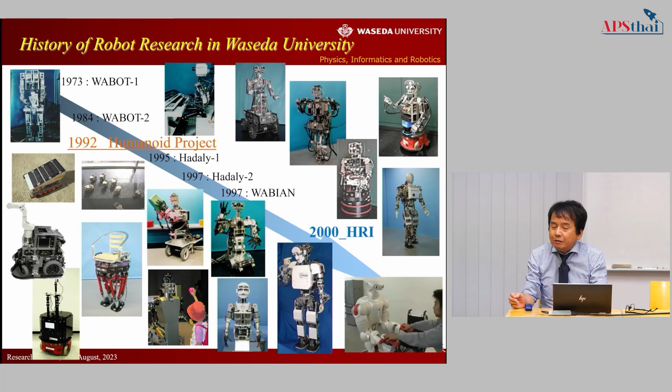We established a humanoid project in 1992, and after that we developed many robots like this. So Waseda University is a very famous university for robotic studies in Japan, not only Japan but the world.

This is a video that introduces the first robot to walk. You see, the robot is able to walk, very slowly like this. Can you recognize it? The robot walked very slowly. Can you guess how many seconds it required?

Almost 30 seconds for one step. This means the robot kept balance in each motion like this to move one step, so it took 30 seconds. This way of walking is very different from our walking, because we do not walk like that. We walk like this, very quickly.

Instead, in each motion you cannot stop. While walking, if you hit something, you fall down. This means that in each motion you do not keep balance. We call this dynamic walking. Dynamic means time dependent. Our body moves dynamically, meaning not static. Static is to stay balanced in each motion. But the first robot was not similar to our dynamic motion, but a static one.

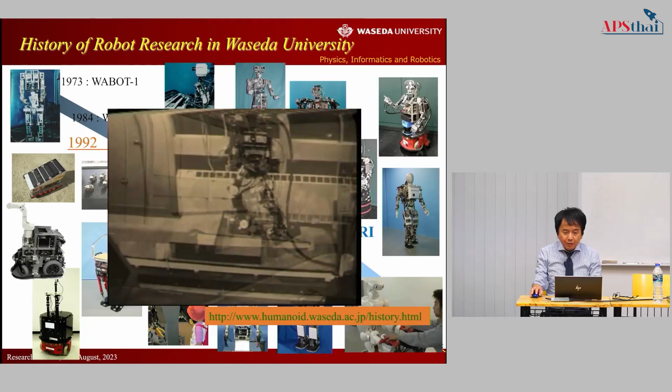Okay, this is WABIAN. It walked much faster, like a human, and also the new version could walk on steps. It was almost 40 years ago. And so far we have developed many kinds of robots like this.

And this is again the second robot to play keyboard like this after reading and recognizing musical scores.

In Japan, we had an expo in Tsukuba City, north of Tokyo, and in the expo event the robot played this keyboard with a real orchestra. It was really a sensational event that the robot could work together with human musical players like this. This is a kind of collaboration with humans.

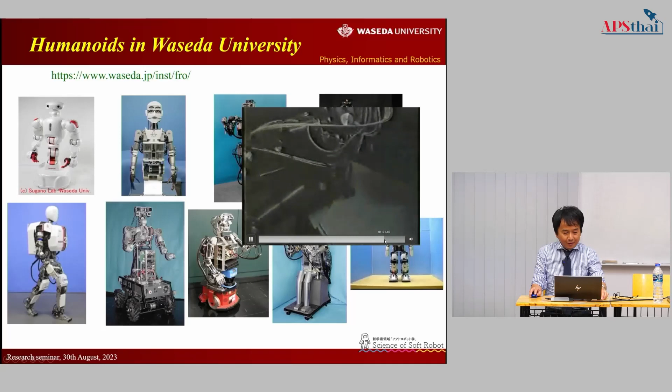Like this. And then next one, this is a biped robot, this one.

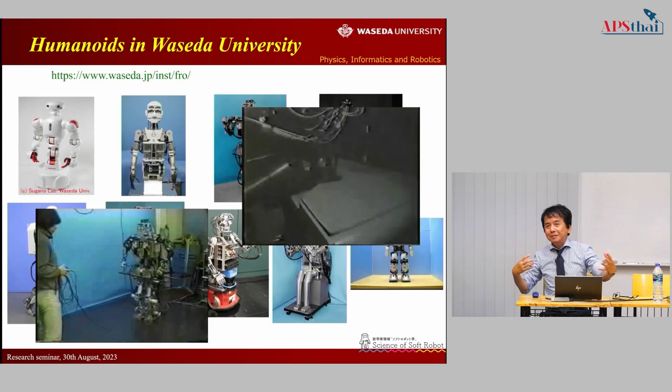This robot is a bipedal robot, and the robot is able to express emotion, like a happy walk or sad walk, like this. It is a kind of exaggerated expression, but we tried to let the robot express human-like feeling by moving the body differently. Also, this is the first trial of such a robot in the world.

And also, this is the latest one. Do you know Gundam? It's an animation. About 5 years ago, we established a project called Gundam Global Challenge, to develop a real-size Gundam and let it move at real size. This is really a big event, and we prepared it for the Olympic Games to be held in 2020.

But due to the corona situation, the Olympic Games were extended into 2021, and the Gundam project was also affected. Professor Hashimoto is the former vice president of Waseda University, and he was the leader of this project. He is also my doctoral supervisor, and in fact I got my PhD from Professor Hashimoto.

This is my colleague in the Hashimoto laboratory, Dr. Ishii, who is also a Waseda graduate. This robot was realized with the power of Waseda University—almost all the members of this challenge were Waseda graduates.

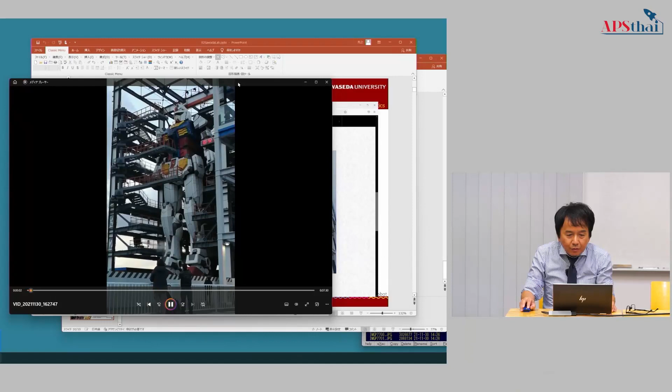This is the human, this is the robot. Let's skip ahead... it starts moving. Let's go, let's go. It starts moving like this.

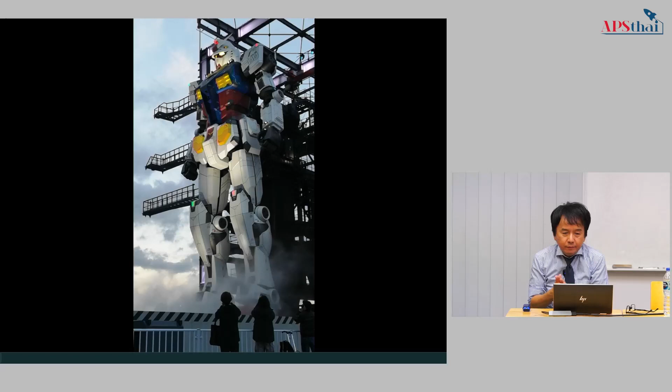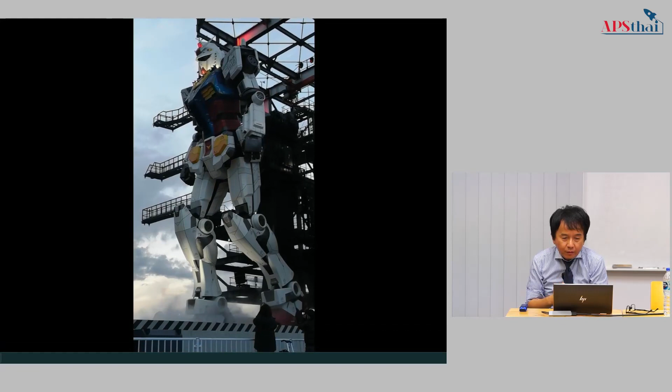Let's skip ahead... it moves like this, with the size 10 times bigger than a human. Incredibly, like this.

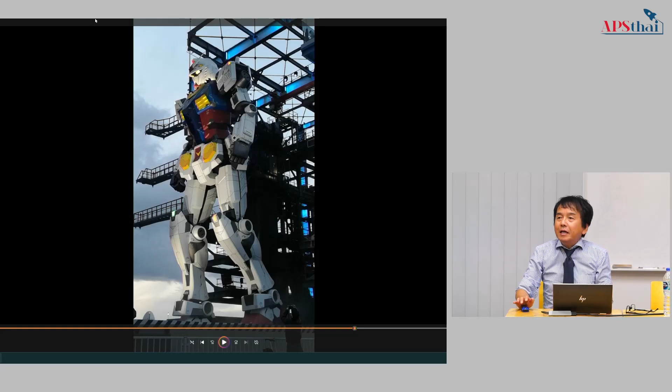This robot will be exhibited until March next year, 2024, so you have almost half a year to see it. After the exhibition, it will be disassembled because maintenance is pretty difficult. Also, this area has a contract until next year, so we have to give the area back to Yokohama city without anything. So if you want to see it, you have to go within half a year—after that, nothing. It's amazing.

It is pretty big, and it is amazing. To construct this one, we developed many components, especially the motors.

How many motors does the robot install? Maybe an uncountable number, especially in the elbows, knees, and ankles. We developed especially strong special motors with special power, because there were no such big motors so far to let it move—so we had a very big challenge to realize this machine.

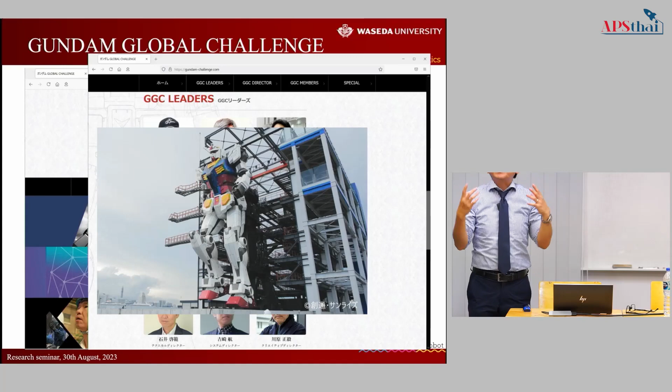Then also, suppose we humans weigh 60 kilograms—the unit is kilograms in Thailand, right? When we walk like this, how much weight would you expect in the knee for a 60-kilogram person?

You can see that aged people sometimes have problems with their knees—some aged persons have pain in the knee or ankle. This means exceptional force is given to the knee or back when you walk or move. Can you guess how much force? About 5 times your weight just to walk.

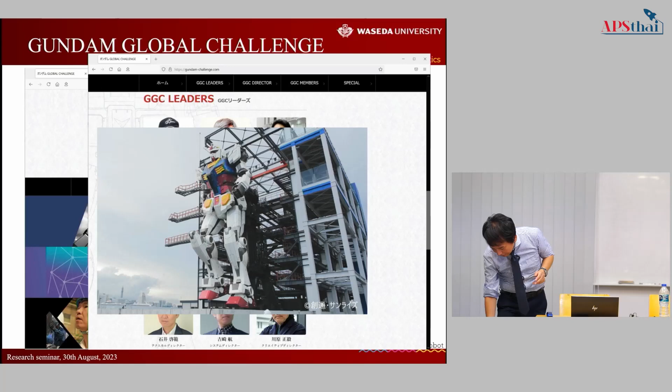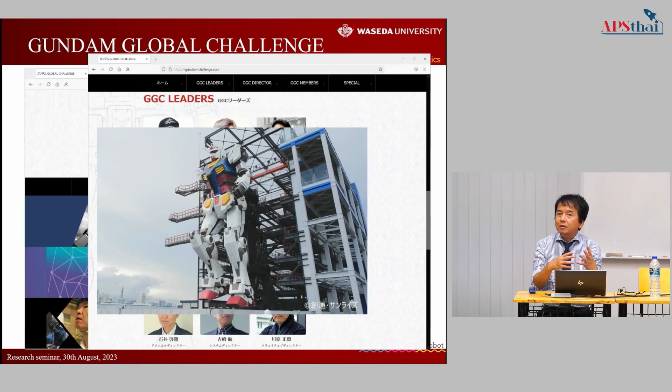For a person weighing 60 kilograms, more than 200 kilograms of force is given to the knee, the bone, and the junction. It's a pretty big force for the human body and biological material like bone and joints. So if you get too strong a force in the knee, you may have trouble in your knee or back due to this force affecting your joints—you have to be careful. Just to walk, 5 times your weight is given to the knee.

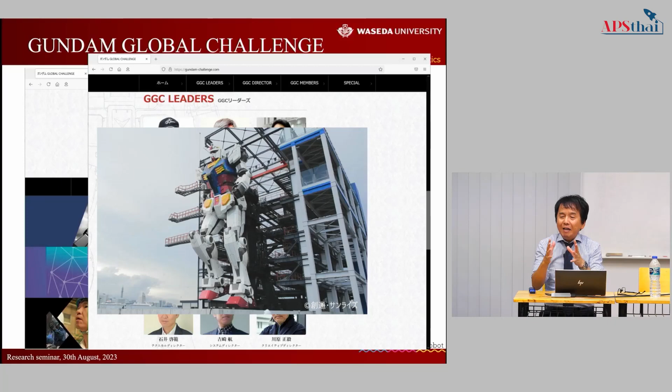And when you run, the force should be 7 or 8 times your weight—pretty strong force. This is physics. 60 kilograms is the static weight—while just standing, static weight is given to your body parts. But once you move, you have the dynamics of motion, which you study in university in the subject of physics. About 5 to 7 or 8 times greater force will be given. This is science. This is physics.

For the development of robots, you have to consider not only the mechanical reproduction of the body, but also how much force is given to each part, because materials have some limitation of given power. It will break if you give stronger force, especially at the junction. If you want to let the junction move, you need to give power or force to the motor for the junction. So this moving force has to be calculated beforehand at the designing stage.

This is very important. If the motor power is not enough, the junction won't move, or it will be broken due to the force. So beforehand, you have to calculate how much force will be expected in the structure of any part of the robotic body, to realize it.

Then the robots. As you know, many robots are running in industries like manufacturing systems and factories. The robots work to assemble or to weld the parts, something like that, and we call them industrial robots. These robots work in industry, I mean the secondary sector of industries. We have many of them. To manufacture such robots, we have to consider the machines and the materials to be strong enough.

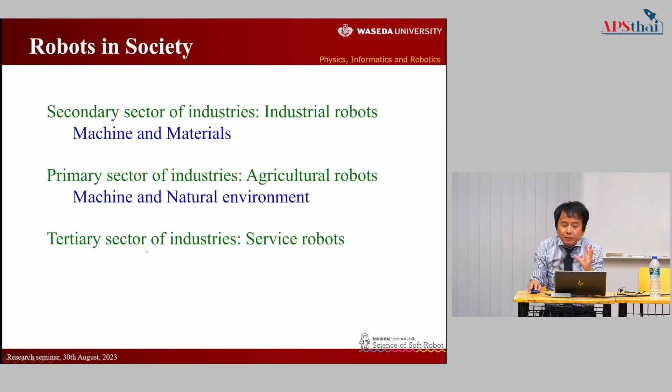And also the third, tertiary sector of industries, which should be service robots or services. These days in a restaurant, we have robots to bring your dishes to the customers, right? Yeah, we have such robots these days. Such a robot is able to recognize the tables and the people. When you walk, the robot stops.

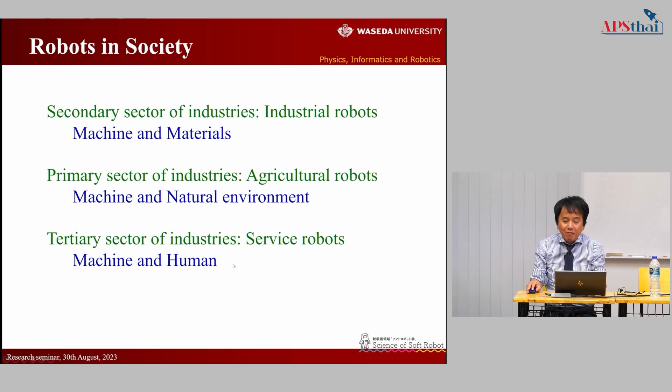And also in the airport, Suvarnabhumi Airport - I came to Bangkok 3 days ago - I saw a cleaning robot in Suvarnabhumi automatically moving. I walked to the robot, then the robot stopped in front of me, not to collide with me. It is good, very good, it was cute. So such service robots have to recognize humans and to work in a human environment.

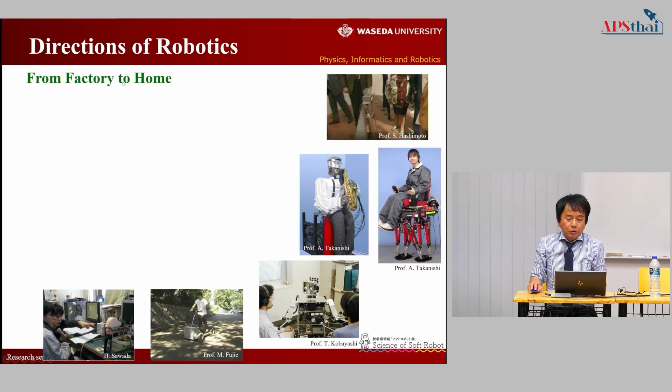Okay, maybe it is okay, I skip it. The directions for robots: in stages, from the secondary sector, to the first sector, to the tertiary sector, the robot should go from factory to home. Such robots have to be human friendly, to work with humans in a human living environment. And then also the robot should be Superman to human.

The industrial robots are something like a Superman, because such robots are able to manufacture an uncountable number of products repeatedly. You know, humans will be tired if they make repeating work, but the robots are not like that. It is like a Superman - they are not tired, they work much faster than humans to produce, right?

But for human friendly robots, the robot has to be not Superman but human. This is an important idea, so that the robot is able to simulate or understand what the human is, so that the robots are able to work together.

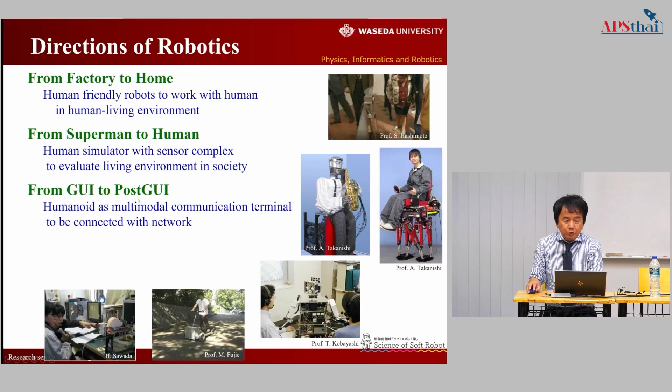And also the interface - interface means the interaction between the robots and humans. Such robots should accept human gestures or human walking, so that the robots are able to work together by body touch or gestures, something. So we call this post graphical user interface, or complex interactions.

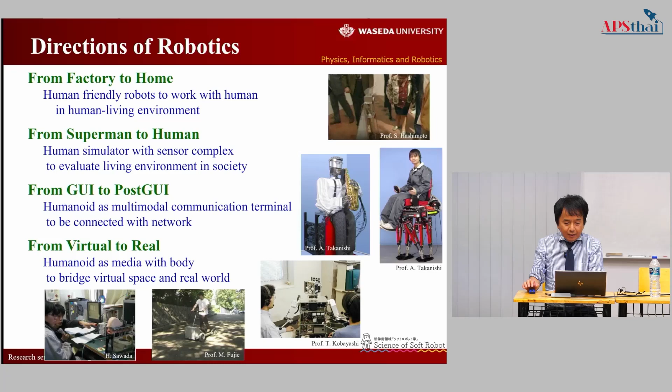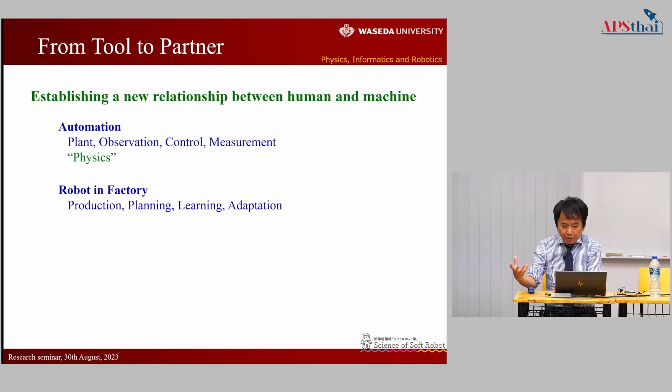Okay, then in the research of robots, so far the robot has been developed for automation. In such robots, what is important is to understand the physics to work in production. And in the second one, the robots in a factory have to work logically, assembling something by following programs.

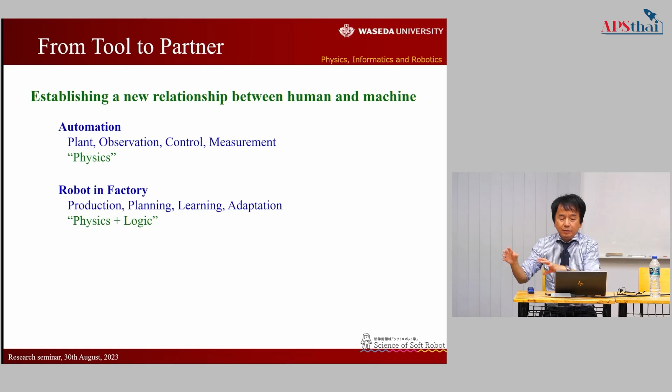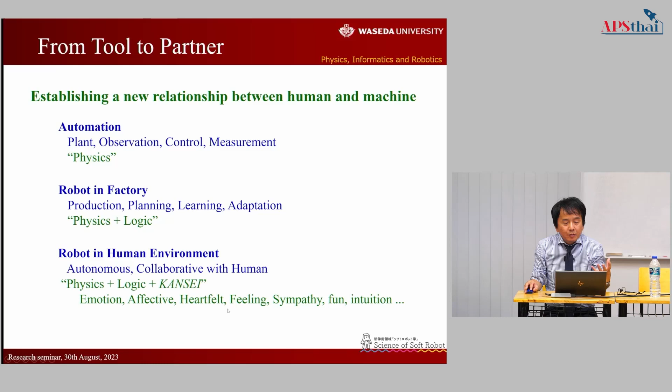And the robot in a human environment has to understand human - kansei is a Japanese word which means emotion, human feeling, human sympathy, or human intuition, something like that. This is what robotic researchers these days are working on to develop new robots. What is important for such robots is firstly artificial intelligence, to recognize the human environment like a human brain - AI is a word, as you may know.

Artificial intelligence is intelligence demonstrated by machines, in contrast to the natural intelligence displayed by humans.

The idea for AI was born about 80 years ago. It was first introduced by McCulloch and Pitts as a neural model, a simplified model of the human nervous system.

Later, at the Dartmouth workshop, the term artificial intelligence, AI, was introduced. AI is the word for reproducing human brain activity or human thinking using computers.

Then Rosenblatt introduced the perceptron, a way to realize calculation using computers.

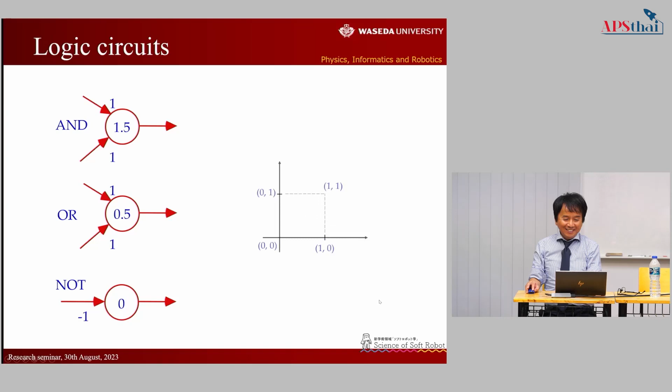Then it has been developed into a computational model like this. The calculation in a computer is made like this. These calculations are made for the learning of the functions to translate input information into output.

Like voice and words, or a face picture and who this is, something like this—any relation. This is deep learning. For detail, maybe you will study this in a university.

And I'll show you some applications of AI. These days, many applications have been introduced in your daily life and work, for example, cameras in the street.

I'm not sure what is the situation in Thailand, but in China, for example, China is an AI country. All over the country, uncountable numbers of cameras are situated in the street, and all the people are recognized in real time - who you are, and where this guy is walking anywhere. Then criminals can be swiftly caught by the police in China.

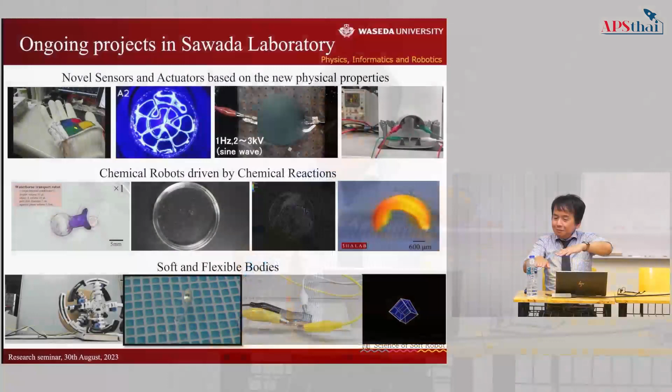And this one, maybe you haven't studied, but the capillary wave involves surface tension. What do I explain... surface tension is... how do I explain? Okay, in a bottle, you have water here. Then there is an interface between the air and the water liquid. In the interface of air and water, there is a surface tension generated by the water against the air. This surface has some tension called surface tension, but this tension changes according to some physical force given from the air.

We try to use this surface tension phenomenon to... how do I explain... you don't know the Fourier transform, maybe not. Okay, do I explain? Okay, sound - does anybody play music? Oh, that's good.

Okay, musical notes, or pitch, have information about the vibrating frequency of the air, right? Each note has a specific frequency. Frequency is the number of vibrations - for example, 100 hertz means the air pressure changes 100 times per second. This means musical notes are related to this air pressure change. For example, C3, the third range of C, has a frequency of 131 hertz, right?

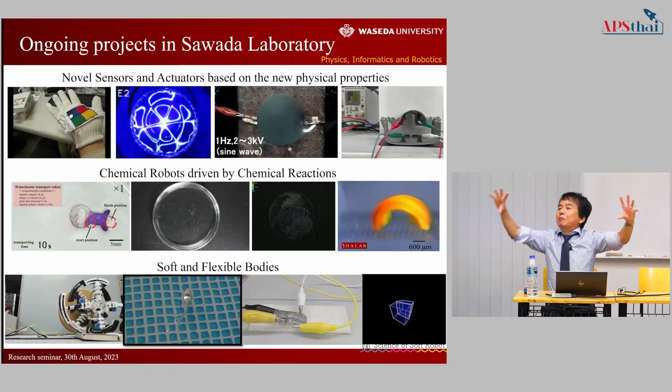We let this robot be a leader. I'm working with a professor in the fishery department, and we try to apply it to make this useful for the fisherman, for effective fishing.

Okay, how do you think of the 4th dimension? Maybe you are living in a 3-dimension, but mathematically we can define a 4-dimensional space, not the time dimension. In 3-dimension we have x-axis, y-axis, z-axis, and in the 4th dimension we have one more axis, perpendicular to each axis.

It is called 4-dimensional space. You cannot see it, but it exists mathematically. You are living in a 3D space, and you watch TV. TV is 2-dimensional because there are only 2 dimensions, right? You watch TV, and you can guess what occurs inside. You can estimate the 3-dimensional space from 2 dimensions. In this manner, you are living in 3-dimension.

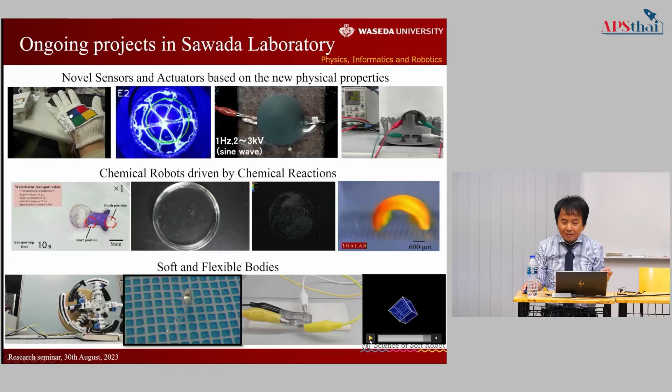We make some calculations like this, mathematical calculations to project the 4-dimensional object into 3-dimensional space. Then we make 3-dimensional computer graphics to let it be seen like this. Okay, then how do I... I have 10 minutes or?

Okay, yes, the new actuator. Do you know shape memory alloy? Oh, you don't know, but you should know. Shape memory alloy is an alloy that remembers its shape.

For example, it is used for teeth modification. For the teeth modification, you put some wires. The wire is made of a shape memory alloy, and it memorizes the shape of the arrangement of the teeth as you wish. Then you put it in.

The inner mouth is kept at a temperature like 30-some degrees. In the environmental temperature it is lower, so you can change the shape. But once you put it in your mouth, the shape is kept and preliminarily remembers the shape. So the wire is used for the modification of the arrangement of the teeth.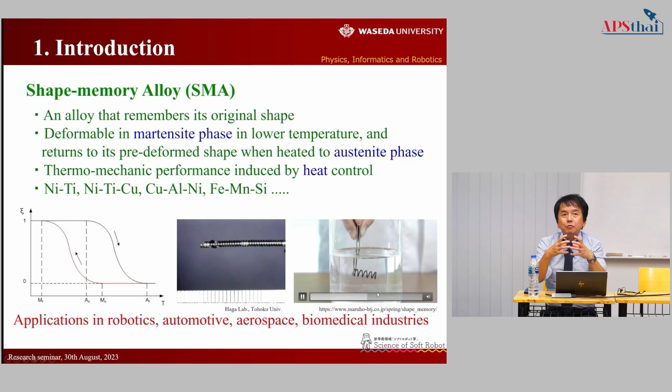Very slow. But in my research, I try to make it move 1,000 times a second. Very fast. And it was successful. I have invented a way to make it move very fast.

Okay, I'll show you, like this. It moves. You see, oh you see. It moves much faster than the other one, and also it moves a lot. The wire is situated here, and you cannot see it because it is small. Then it is extended into a longer one.

Okay, you see, it moves like this. In this part, the wire moves. And also the wire moves up to 1,000 times per second. This means that by giving this vibration to this wire, this motion can be detected electrically.

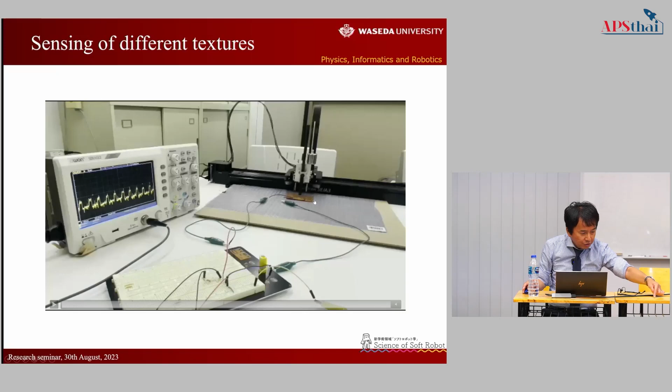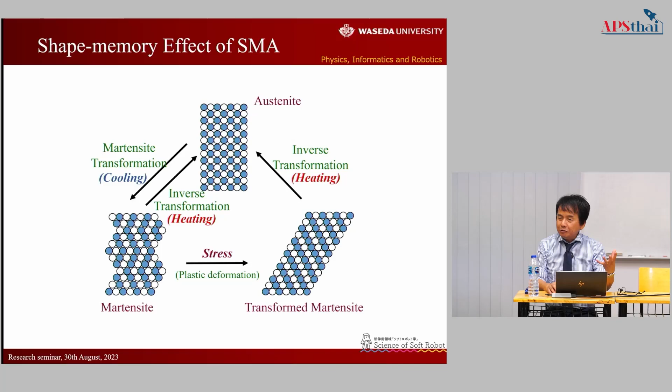We realized it by giving tension, then the resistance changes like this. This means this shape memory alloy works to make a vibration, and simultaneously it is able to sense this small motion, to sense different textures. So far these are the physical phenomena that you will study in a physics department in a college.

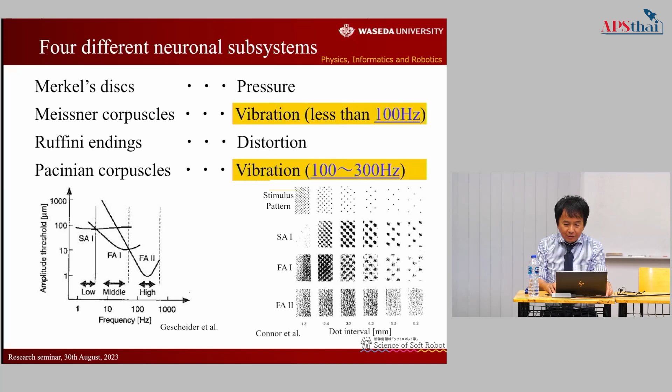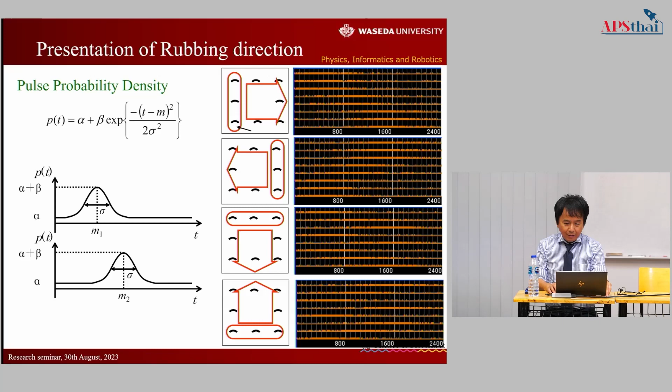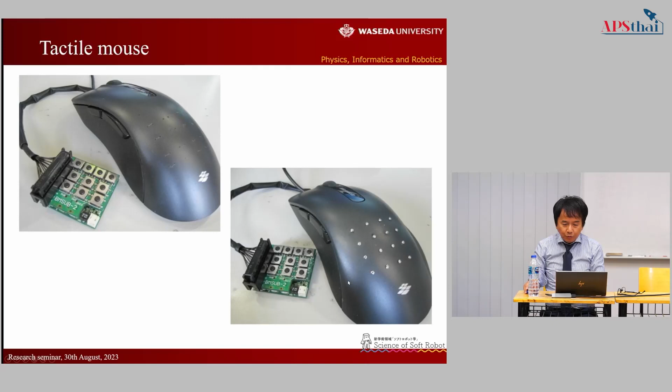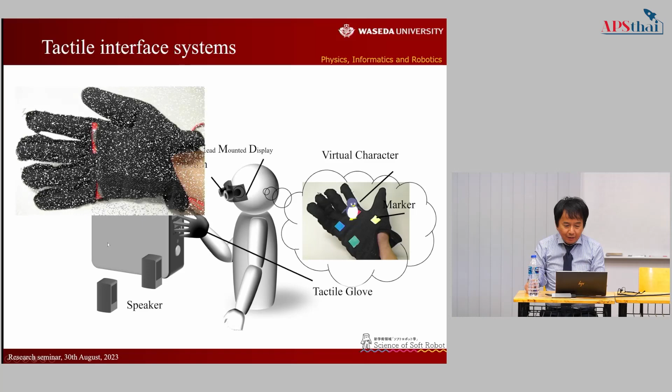We have developed a tactile display and tactile sensor. I don't have much time, so let's see the results. With a tactile pen, the tactile displays are situated here. By stroking the display, you will feel the different textures inside the computer, like this. And also this is a tactile mouse, so that you feel the object inside the computer. And also a tactile glove, and this is the demonstration you already saw.

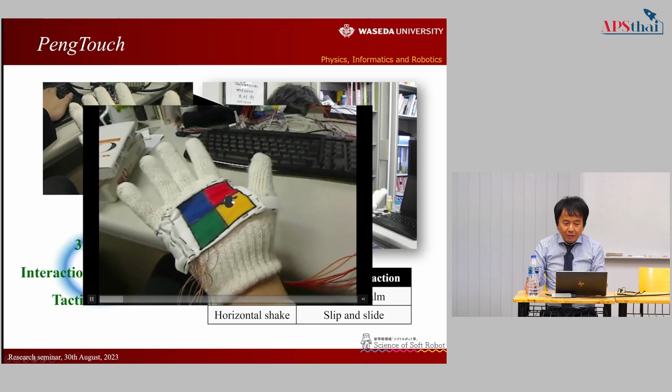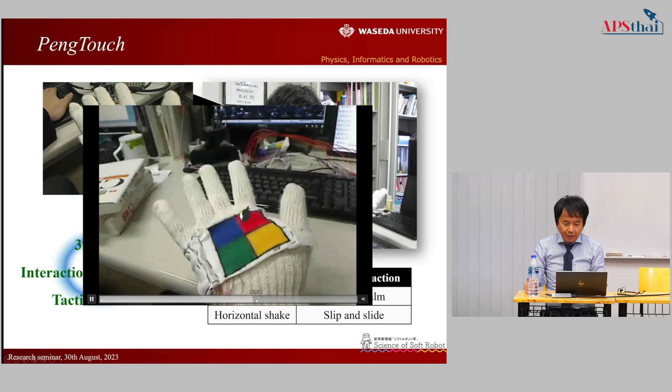The penguin is walking. Also, by moving his hand, it jumps, and the jumping sensation is felt on the glove. Then you shift it, the penguin slips, and slipping sensation is given like this. In this manner, different sensation is given to the glove.

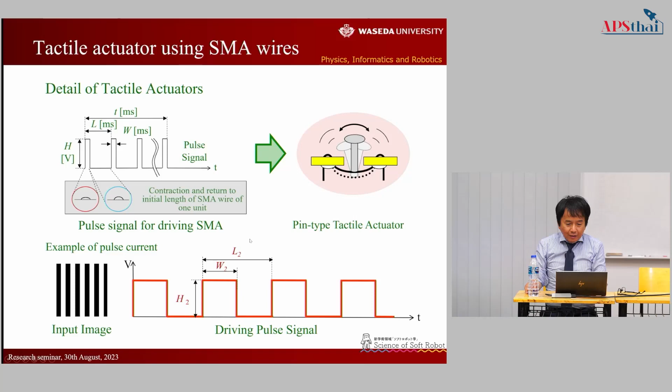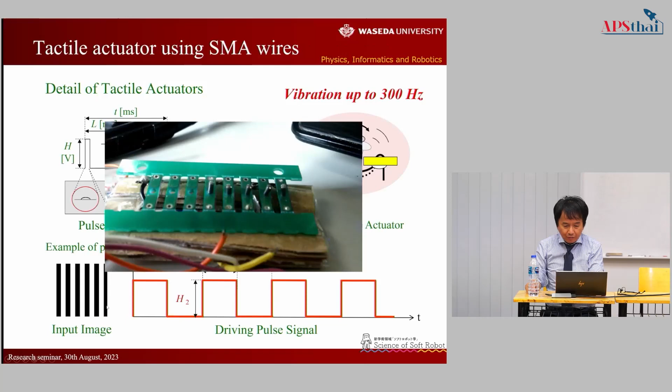The actuator is moving like this, and we put this actuator into the grip, so that this guy is able to control this robot. Here the camera is situated, and it records the floor picture, which is shown here. Then the sensation of the floor is simultaneously given back to the user in the grip.

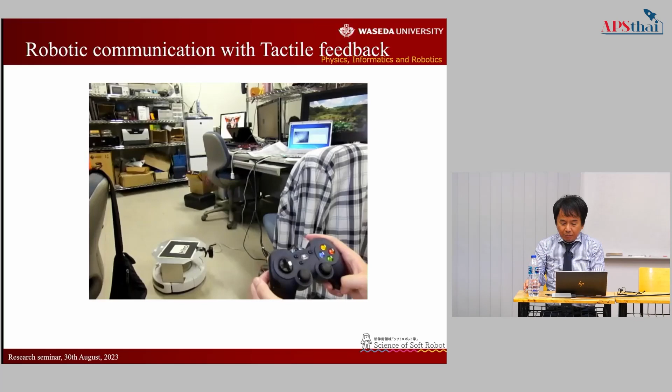The user is able to move the robot in a distant place. The robot moves, sends the picture that it sees, and the sensation is simultaneously sensed by the grip. And now the fish robot.

This is a robot, see, like this. This robot, maybe I have the bigger one. This is a fish, real fish shaped robot. Firstly, it swims very slowly like this, and then the next one, faster, faster moving, and much faster, like this.

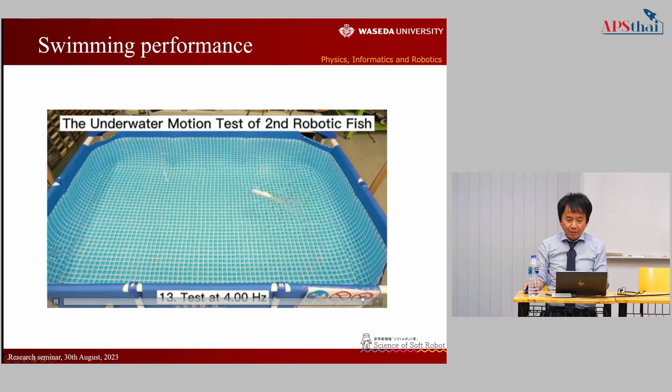Yes, the robot is able to swim in a different way, like a real fish. Much faster, yes. And also another student is now developing a stingray robot to swim like this.

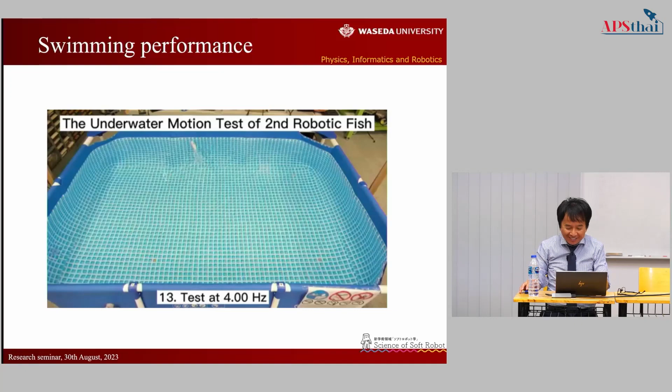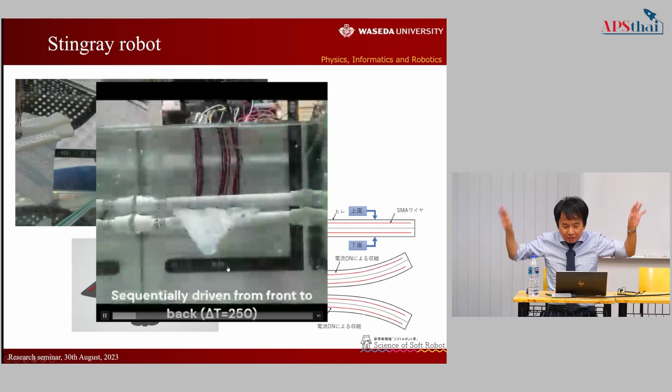Not only this one, but also this one in the water. Yes, this is like a stingray, stingray motion. The fin is controlled in water like this.

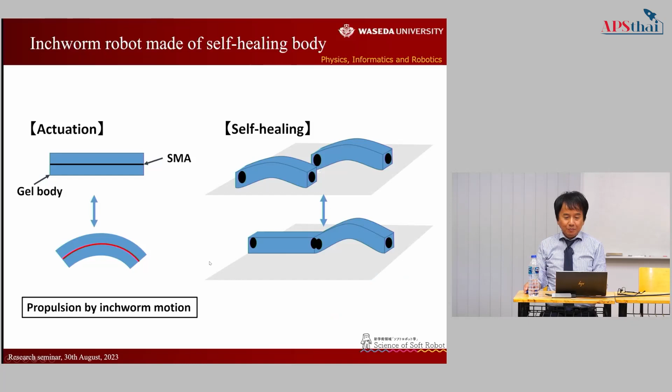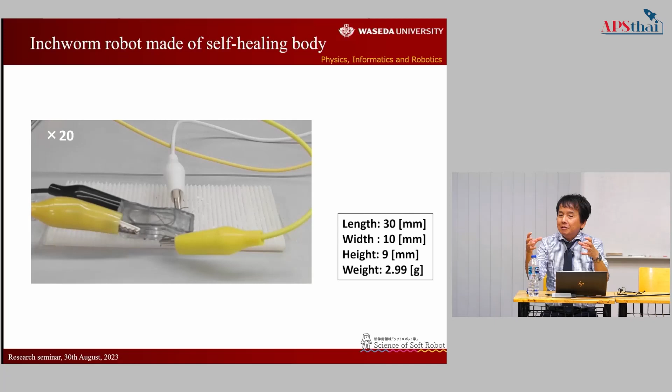And this is an inchworm robot that walks like this. Also, this material is able to self-heal. Once we cut this one, the robot randomly moves to find another pair and then contacts it. Then in 24 hours, it becomes one robot to move again, like a real creature.

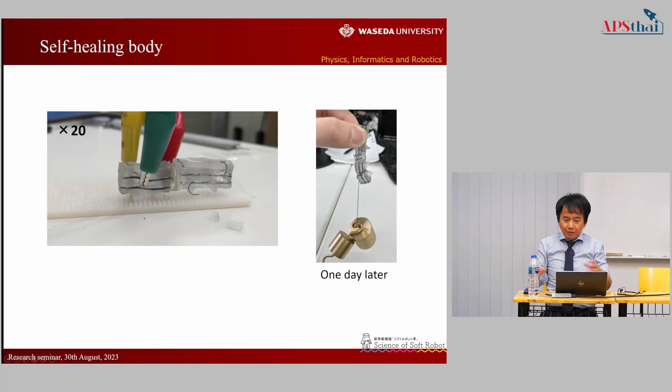Walk, like this. Why doesn't it move? Okay, like this. And then one day it becomes one.

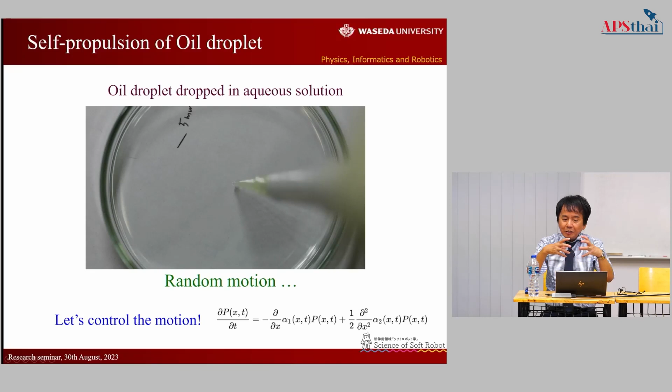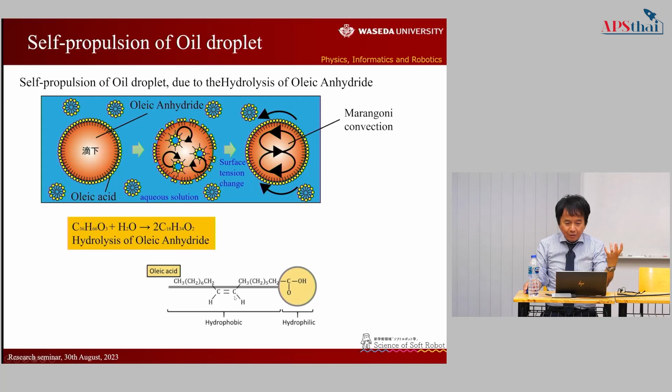The droplet randomly moves like this, right? It's not controlled, but that's some equation - random motion is described in an equation like this. By considering some chemical reaction, we could control the motion of the droplet.

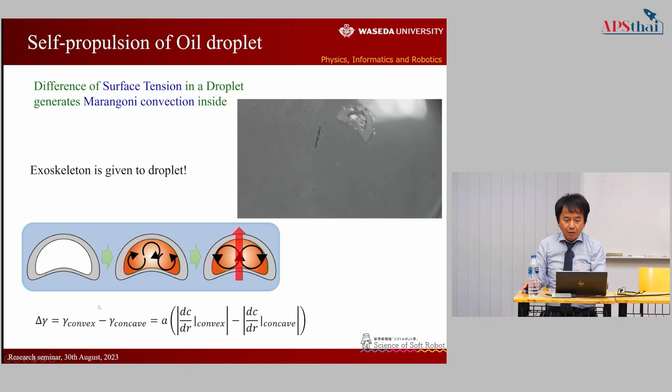See, it moves straight from left to right like this, by considering some conditions of tension, surface tension, under Marangoni convection. With this direction, this convection is called Marangoni convection. Then we consider the equations called Navier-Stokes equation and the diffusion equation. Maybe you will study this.

And for typhoons, you see a weather forecast, right? Especially in the course of the typhoon, the weather forecast has difficulty precisely predicting the course, because the air motion is governed by the Navier-Stokes equation.

It is described like this, but it has chaos. Chaos is a physical phenomenon that cannot be predicted by mathematics. Chaos is a phenomenon that has great dependence on the initial condition. So the time development is governed by the initial condition. With a very small difference in the initial condition, the chaos develops very differently. So it is mathematically developed, but it cannot be predicted due to the uncertainty of the nonlinear effect of this equation.

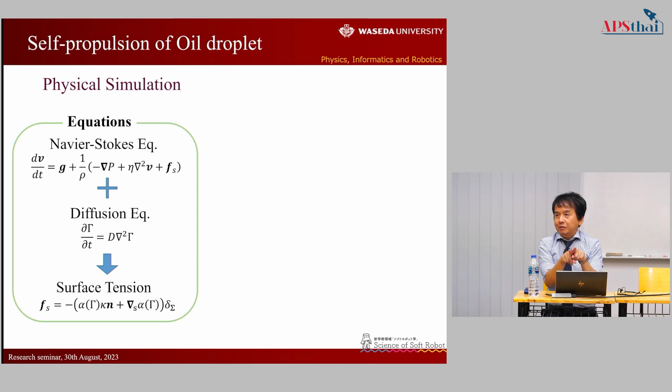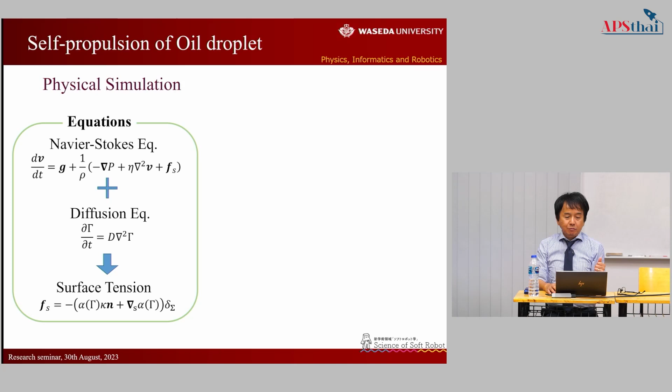This is a very interesting equation. As you may know, if you can obtain the mathematical solution of the Navier-Stokes equation, you will get $1 million, because it is one of the 7 millennium problems presented by the Clay Mathematics Institute. So it is called the millennium problem, and it is not yet solved mathematically. So we can make it in a computer simulation, and we try to apply this physical phenomenon to the control of the droplet, and it was successful. It moves like this.

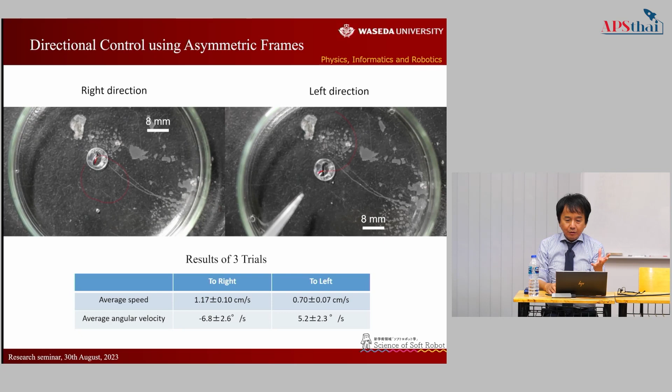Okay, the last one. This is the last topic, the application of AI, especially deep learning.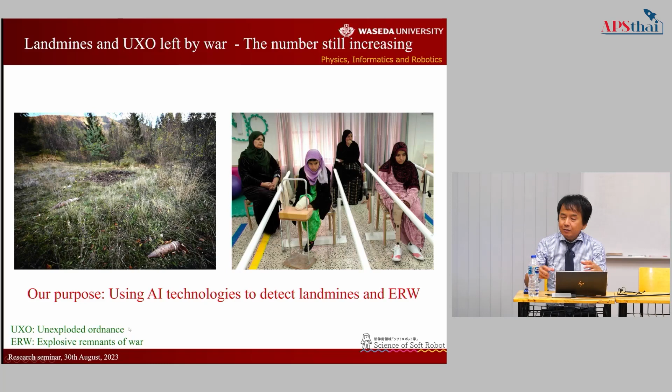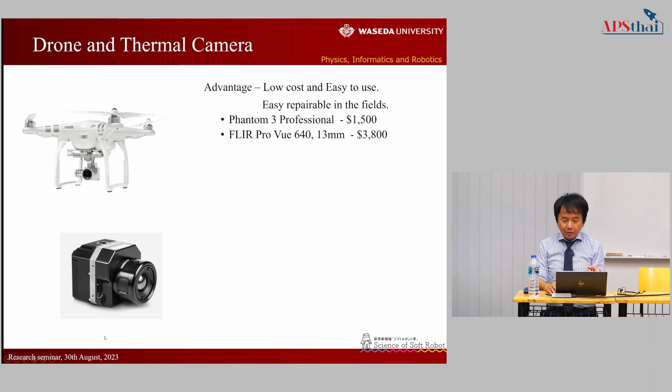In this project I am working with the International Committee of the Red Cross to automatically find landmines and unexploded ordnance buried in land. It is a very big problem. So what we are doing is use a drone and thermal camera, because landmines have different physical properties of heat radiation, and the heat radiation of the landmines is different from normal land, grasses, and other things.

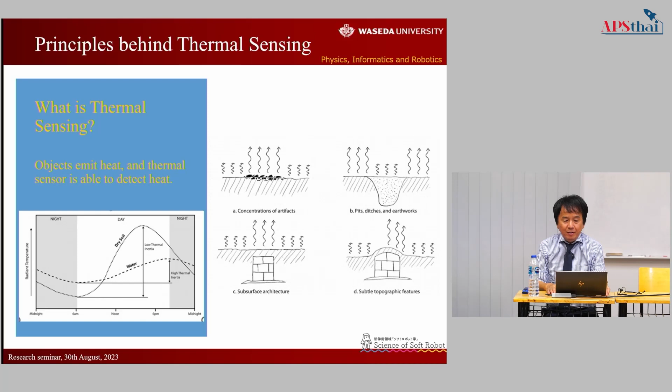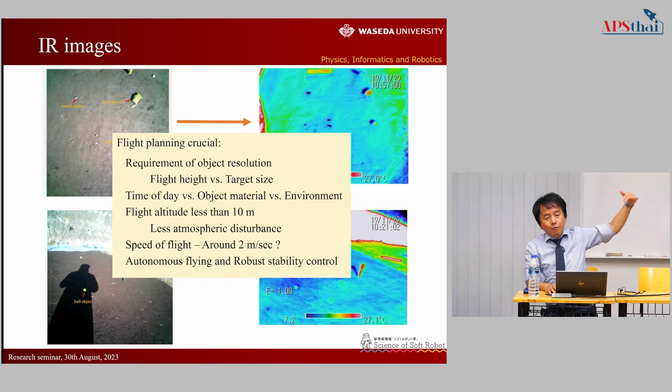By using a thermal camera to detect heat radiation, we see different colors in the thermal pictures representing different objects. We try to automatically extract those objects using a thermal camera and a drone flying over the land. Then we apply deep learning like this. So far we have successfully detected landmines of different kinds, different species, like this. This is the project.